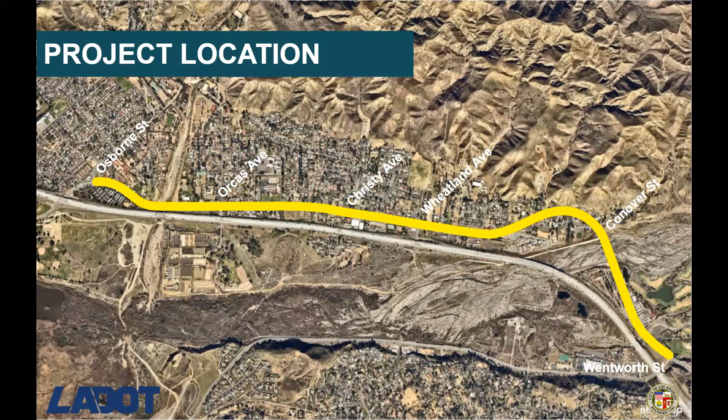The Foothill Boulevard Safety Project is on Foothill Boulevard between Osborne Street and Wentworth Street in Lakeview Terrace. Based on community feedback and concerns shared with LADOT and Council District 7, the project is designed to improve safety and visibility on the corridor, encourage safer speeds and driving behavior, maximize use of the road shoulder to create safer space for everyone, and make the street feel more comfortable for people who live, walk, ride, roll, and get around on Foothill.

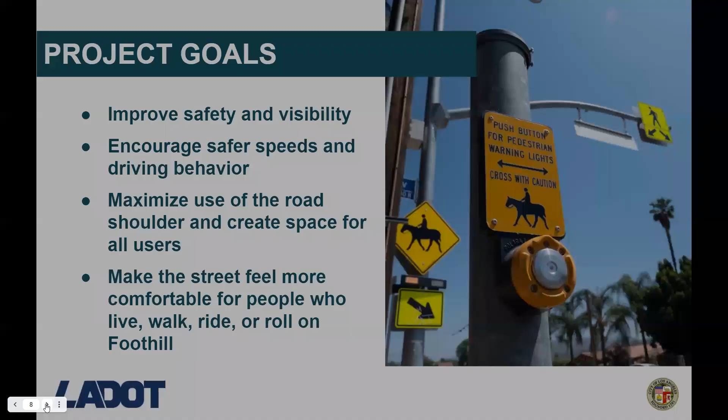This project has a background, and the council member spoke to it well. Councilmember Rodriguez initiated the Foothill Corridor redesign with a council motion in 2019. Last year, just before the pandemic, Council District 7 hosted a community meeting at Lake View Terrace Rec Center, which kicked off the conceptual design process. Since then, LADOT has been working on the design we're going to show you tonight. In the meantime, the city implemented a phase 1 of improvements, including street lighting upgrades, hedge and tree trimming, and essential maintenance to make the street safer while we work on the redesign.

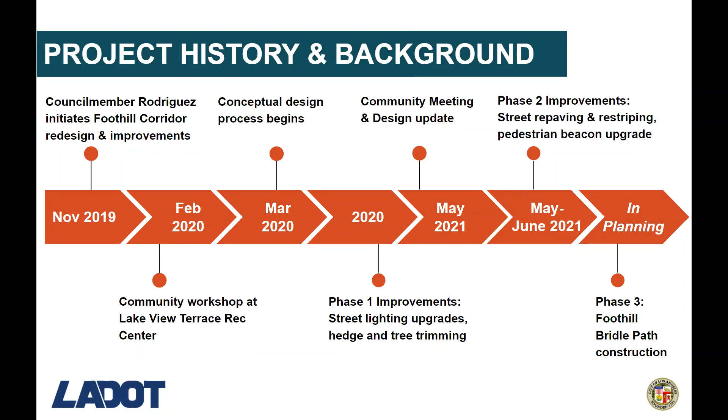Tonight we're here for the community meeting and design update to talk about phase 2 improvements: street repaving and improvements to a pedestrian crossing at Christy, along with specific safety features along the corridor. Planning for future years is a following phase, initiated by the council member, to install a bridle path along Foothill to connect things and create a high-quality facility.

I'm sure most folks here this evening are residents and stakeholders very familiar with this vibrant corridor in the heart of the foothills. There's a lot of recreational activity with equestrian facilities and trails, the wash, the Hansen Dam area, the golf course, faith-based organizations and churches, and of course the community that lives and works here—so a lot of people using the street. At the same time, there are significant safety issues the community has expressed a lot of desire to have addressed, especially with all these different users. Community members have reported high speeds, poor visibility, and as you can see, it's a wide street with people using it in unpredictable ways. Some of these issues we can aim to solve with design and safety features, and we're looking forward to the opportunity to do so.

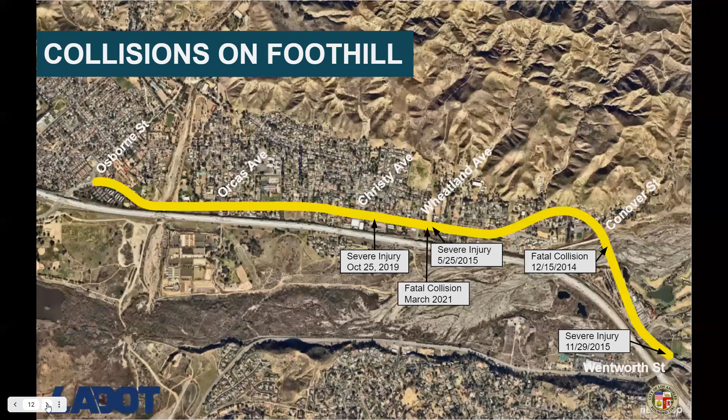I want to take a moment to highlight that visibility is definitely something we've heard is a major concern. This need has been recognized and is an ongoing effort to improve. Council District 7 has been proactive in making reflective horse gear available, and the street lighting has been upgraded last year. So if you're an equestrian interested in reflective swag for your horse, please reach out to the Council District 7 office for more information.

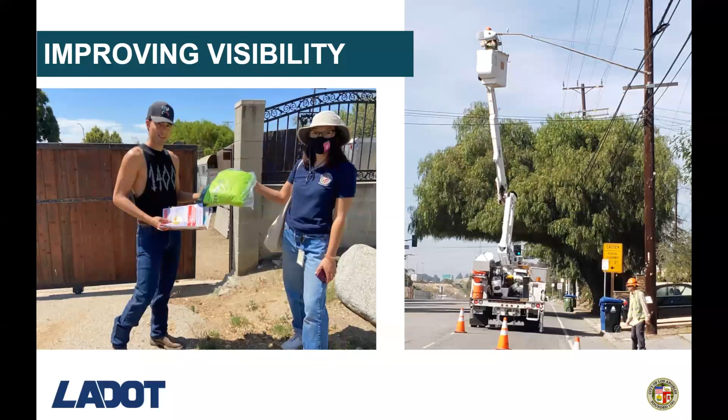So last year in February 2020, CD7 brought the community together at Lake View Terrace Rec Center, in partnership with the Foothill Trails District Neighborhood Council, to discuss needs and priorities for the street and the neighborhood.

People contributed ideas and feedback to several maps and gave us really important qualitative information and ideas about what needs to happen. Some great ideas were compiled, and here is a summary. Many people attended, which is really great. Here's a summary of what we heard: there's a need for new and improved crossings, sidewalks or paths to improve access to local trails, more signage to improve visibility for everyone, marked or separated bike lanes, and ways to address speeding.

But I will say that this part of town is one of my favorites to work in, and this is a great, exciting opportunity for me. I know some folks have already mentioned in the chat that there are other streets that need attention, and this is not the end of our road show here. We're going to be moving on to other streets in the near future, and this is a great opportunity for a partnership between CD7 and DOT.

This street today, Foothill Boulevard in this segment, is, as I'm sure you're all familiar with, pretty high speed. It features 4 lanes, 2 in each direction, with parking on both sides intermittently, although not heavily used in all places, but there is essentially a parking lane/shoulder. This image here is just east of Christy.

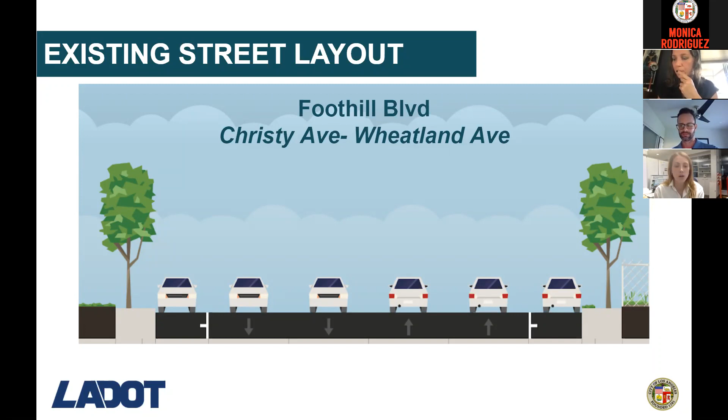So the new project would repurpose the roadside space west of Wheatland to create a protective barrier between the travel lanes and the roadside shoulder. So where previously we were showing curbside parking, street side parking, we'll be repurposing that space to create a flex zone, a protected shoulder with a striped buffer and bollards.

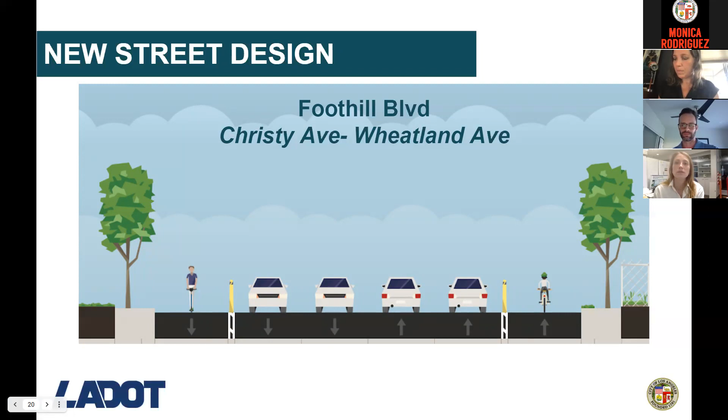And then a little bit further east, between Wheatland and Esko, there is an existing bike lane in each section, and there are 2 travel lanes in each direction. For the most part, there's no existing parking here. There's primarily a tow-away no stopping zone.

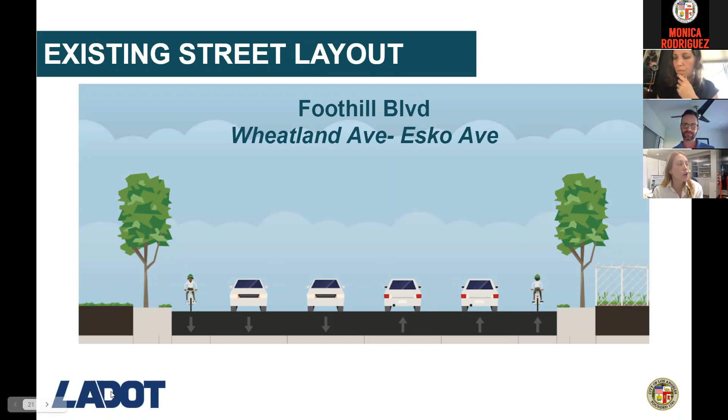What we're proposing is to narrow the travel lanes just a little bit. It will almost be imperceptible, but it will seem to narrow the street and will encourage drivers to slow down and use more consistent speeds. And with that extra space, we're able to add a buffer and a bollard.

And I see the question in the chat, why are we seeing bikes and not horses? This is a horse community, absolutely. I think there's a software program that we use that doesn't have a horse feature, and I've been thinking that it's not well adapted for every community. We know horses are definitely a priority, and equestrian safety is really important here. But there are other users as well - people who may use this to ride bikes, scooters, or other slower moving devices. So it's a conceptual representation.

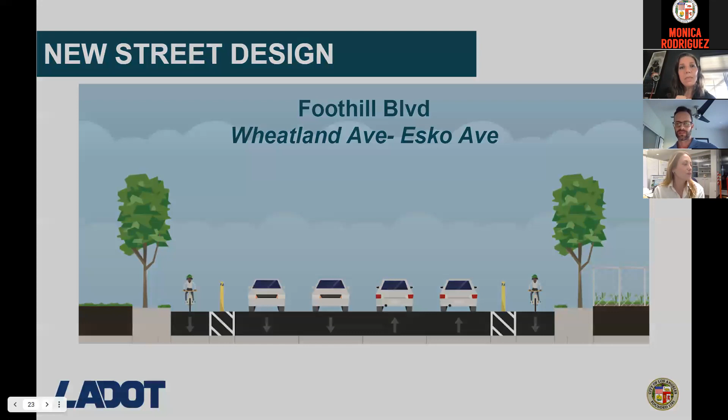And then Foothill Place to Conover, Tim touched on this. There's a gap right now in where the bikeways are. There's only a westbound bikeway, no eastbound bikeway, and the travel lane widths are quite wide.

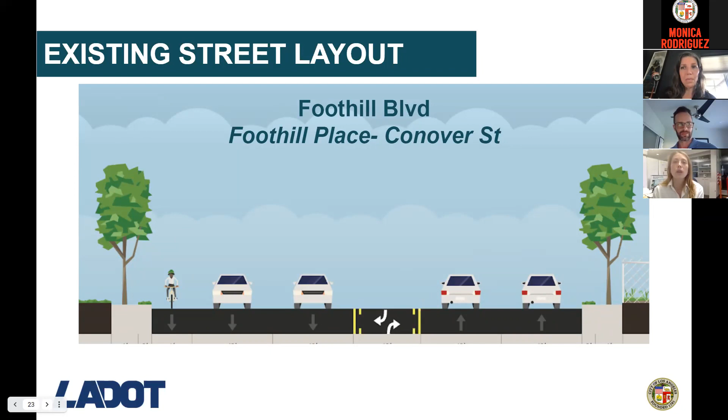So the new project would level out and balance the street, provide that eastbound connection, and also narrow the roadway just a little bit, or narrow the lane widths just a little bit.

I want to point out that there are no changes to the number of travel lanes. The number of travel lanes will not change. We're not reducing lanes for vehicles. They're just going to be a little bit more narrow as a safety feature, and that is a design feature that can help make the street safer, as well as enable some space for that safety buffer between the sidewalk and the shoulder, and the faster moving traffic.

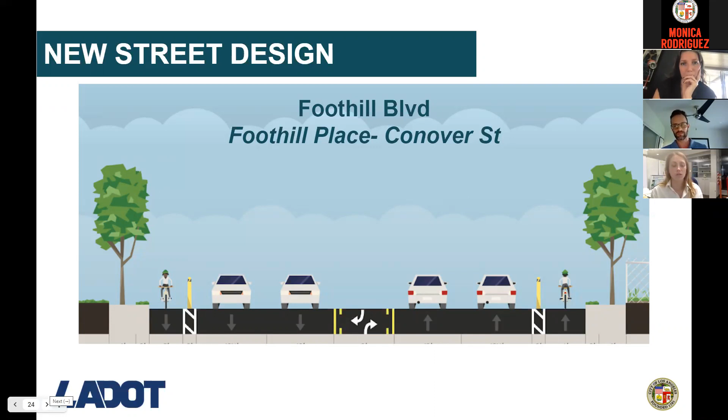And I also want to highlight here, there are important benefits for people whose homes are here, who are living here. There's just a little bit more space between maybe their front yard, or where they are entering their car, and where vehicle traffic is moving really fast.

So here's where we will be adding key safety features, and we'll walk through each of these locations in a little more detail. This is a map layout of the corridor overall. It's also where you can see the distinct segments in terms of what's happening in the space along the shoulder.

East of Wheatland, there are existing bike lanes that will be improved and upgraded. West of Wheatland, we'll be creating that safer shoulder area for all users. Once we can improve the pavement condition, these will become designated spaces for bikes as well, and these can be used by everyone using slower moving modes.

I do want to point out, and Tim touched on this as well, that the street will be repaved east of Wheatland, and that is what enables us to implement the design features for bikeways there. Then over the coming months, potentially the next year or so, we will continue to work with our partners in Streets LA to repave the rest of the corridor and improve the pavement condition.

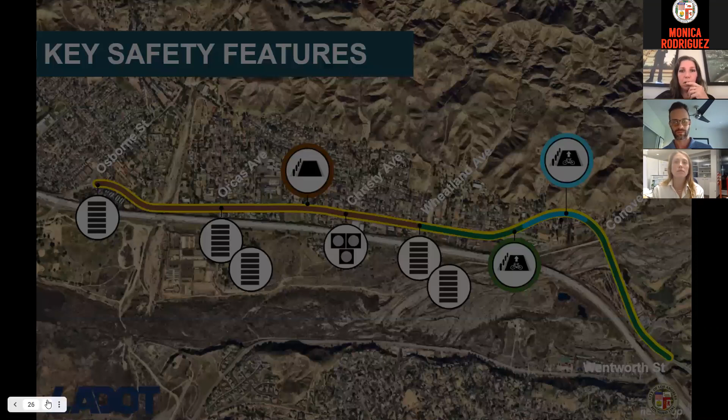Where we're adding the protected shoulder is from Osborne Street to Wheatland. We'll be adding a new eastbound bicycle lane connection between Foothill Place and Foothill Place, where there isn't one right now, and upgrading protected bicycle lanes from Wheatland Ave all the way to Wentworth.

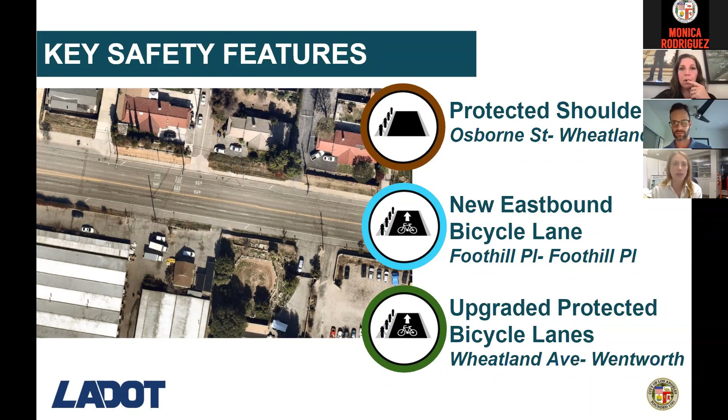This is where the major crash happened in 2019, in which two horses were struck and killed, very sadly.

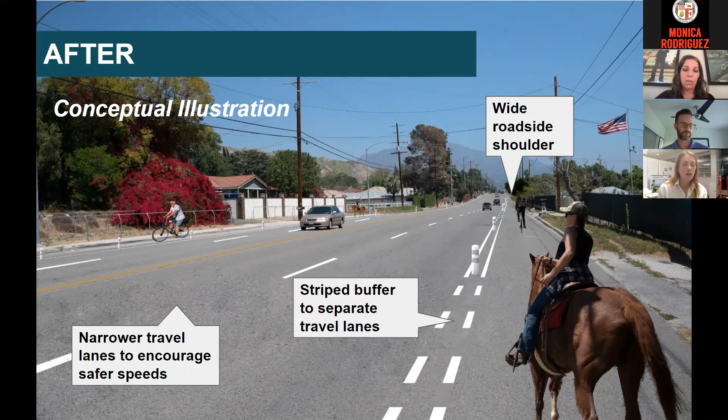Next up here is Foothill and Osborne on the east end of the project area, where the crosswalk will be upgraded crossing Foothill.

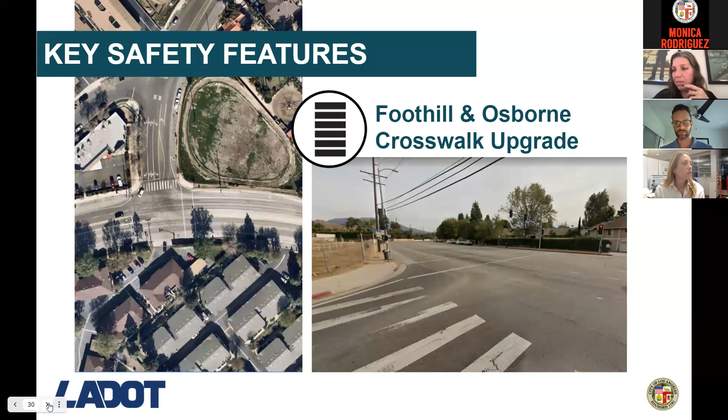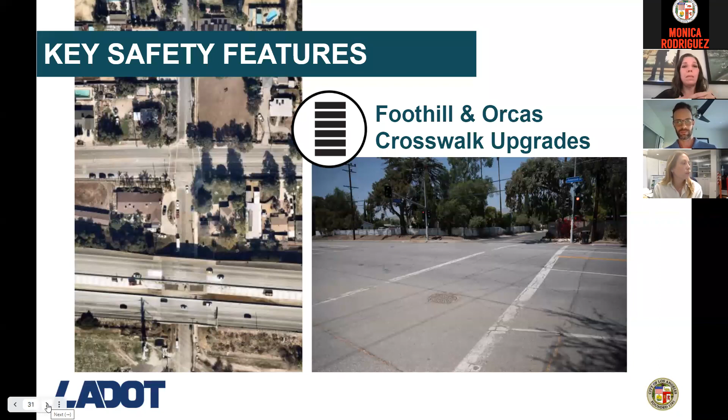At Foothill and Orcas, the crosswalks on Foothill will be upgraded to high visibility continental crosswalks at this really frequently used crossing location. And then again at Foothill and Wheatland, we will also be upgrading the crosswalks with high visibility continental crosswalks.

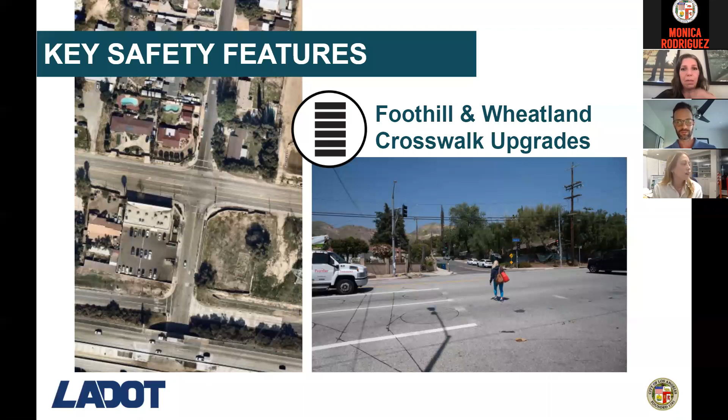For an example of what that looks like, here's Wheatland today, which of course is another very frequently used crossing point for people accessing trails in the Wash south of the freeway. And this is what a continental crosswalk looks like. This will improve visibility and safety of people using the intersection.

LADOT is also working to improve the crossing point at Christy, which is currently a flashing beacon activated by a push button. But the beacon is by the side of the road. The light is by the side of the road.

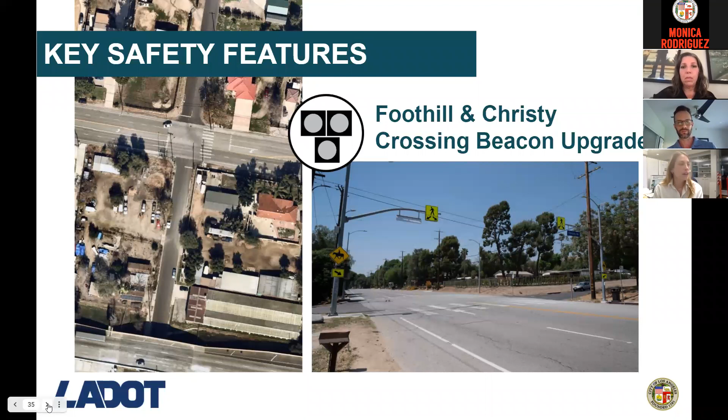It's going to be upgraded to a new beacon called a HAWK, or a high intensity activated crosswalk beacon. The beacon will have flashing lights above the crosswalk. It will be highly visible, also activated by a push button.

If I can just jump in real quick, the image is a little misleading on the right. The HAWK beacon is very new in Los Angeles. It's actually a flashing red display that looks almost like a railroad crossing, and vehicles are required to stop, and the users of the crosswalk will get a walk sign. So it's significantly more robust in terms of the protection and the yielding of vehicles compared to any sort of flashing yellow beacon that we used previously. So we're starting to move into doing more HAWK beacons for major street crossings like this one.

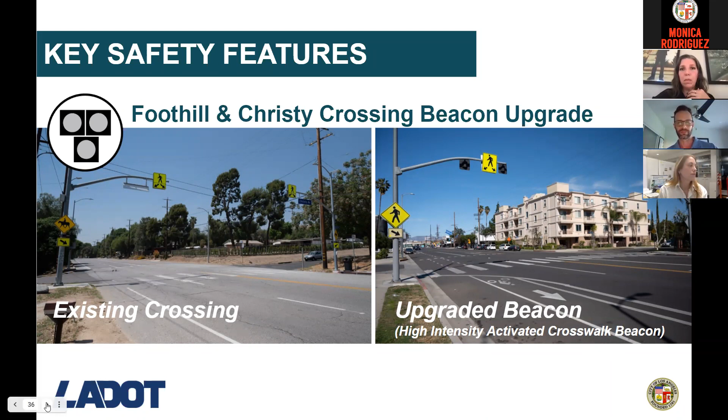Lastly, to recap some of the considerations in terms of what's changing and what's not changing: there will be changes to on-street parking in key locations where parking is repurposed to create a safer street. There will not be any changes to the number of travel lanes. There will not be impacts to emergency vehicle access or capacity in that way. And there is bus service here on Foothill currently through Metro Route 90. This project will not influence the location of bus stops as part of the project at this time.

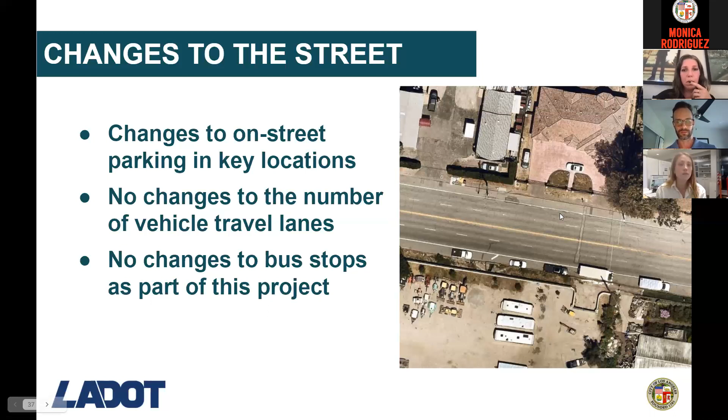The project will create more consistency in the street design throughout the corridor and create a consistent, predictable degree of visibility and layout of the street. Overall, the project aims to balance the needs of parking where possible and really focus on the safety improvement and the safety benefits that can be gained there.

Now I will hand it over to Eve to talk about what's next in this process and when you can expect to see changes.

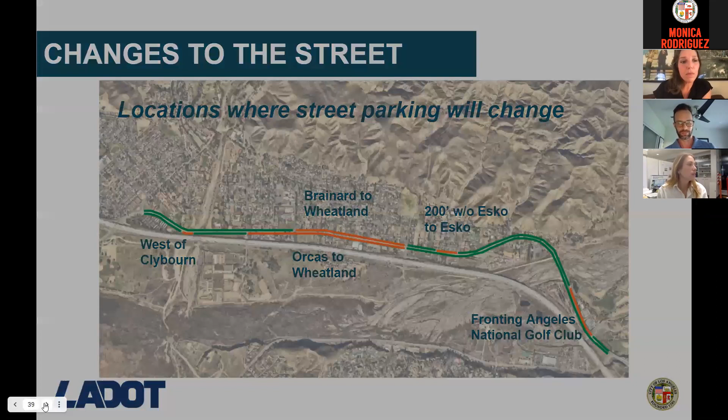Hi everyone. We are anticipating a large section of Foothill from Esko to Foothill Place, right next to Conover, to be resurfaced the weekend of June 5th and June 6th. Following that, we will go ahead with the actual restriping of the street to enact the changes we're talking about right now.

We are going to continue moving forward with resurfacing different sections. The next section we'll focus on is Foothill between Esko and Wheatland, currently scheduled for our next fiscal year, 21 to 22. As we go, we can convert the shoulder space into what's considered an official bike lane.

I also wanted to address some concerns. This is working in coordination with several other departments. As the councilwoman referenced earlier, we worked with the Bureau of Street Lighting to increase visibility, and we're working with DOT to create safer space on the street. But obviously the safest space for equestrians and horses is not to be on the street at all, but on a separate bridle path.

Separately, we're working on creating a contiguous bridle path on the north side of the streets. That will be happening as well, but it will likely take longer because it's in the right of way, so we have to go on a property by property basis. This is really designed to maximize that shoulder space that can be used by bicycles, by horses currently riding in the street, and also by people who walk in the street. I wanted to address that briefly, and then we'll continue with the resurfacing.

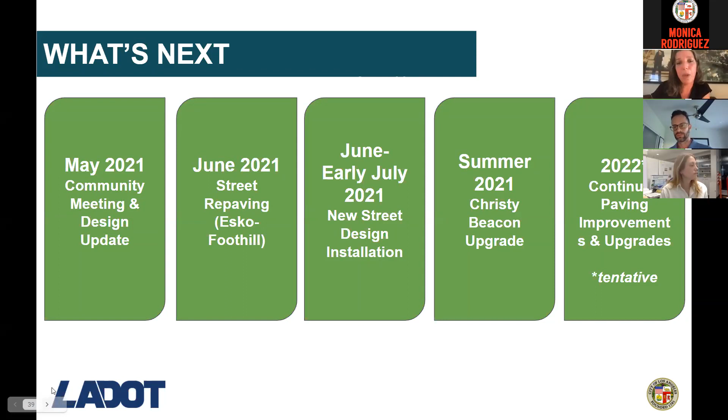Okay. And we'd love to hear from you at LADOT and at Council District 7.

There is a project webpage, which I can drop the link in the chat box. That project webpage offers a feature where you can add your own feedback to a feedback map, giving us your ideas for signs, maintenance, safety, and street enhancements. We also have a link to the project video on the webpage and some additional information. We'll link this video there too.

In the meantime, please reach out to us at LADOT at ladot.active@lacity.org, or at Council District 7's office at the council member's email, which is on the screen, councilmember.rodriguez@lacity.org, or call 818-352-3287 to provide your feedback.

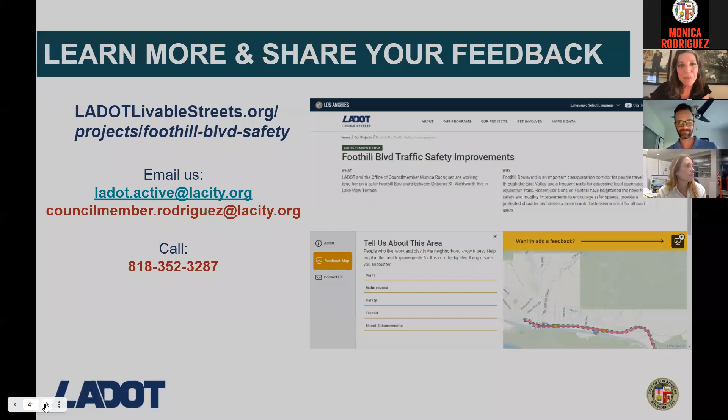With that, we are happy to take any questions. I see there's a lot of comments and discussion in the chat box, which is really great to see. We've been getting a lot of questions coming in, so perhaps I'll just start with the first one.

When is the left turn phasing signal going to go in at Osborne and Foothill? Oh, never mind, I actually have the answer to that. Estimated March 2023, and it's part of a package of other left turn phasing signals.

There was a question about what can be done in terms of street racing. If you have specific information on a regular street racing location and times within a two-hour period, you can report this information directly to the Valley Traffic Division Signal Enforcement Team. I'm going to drop that link in the chat right now—I just put it in there. They'll be able to coordinate their team to address the street racing.